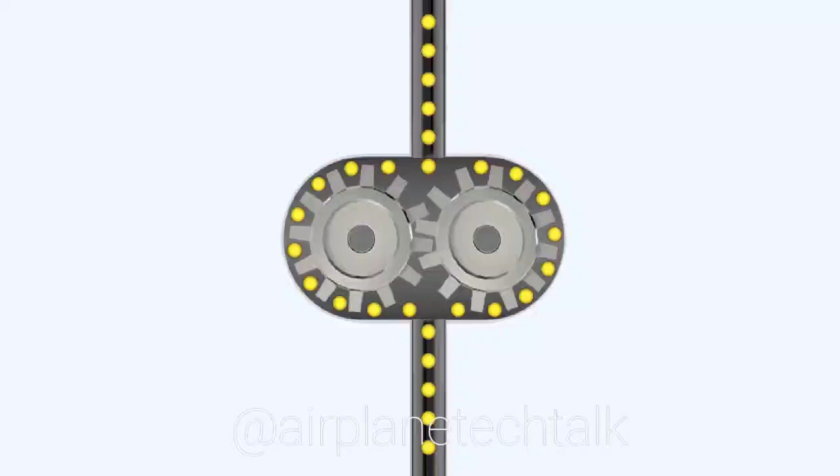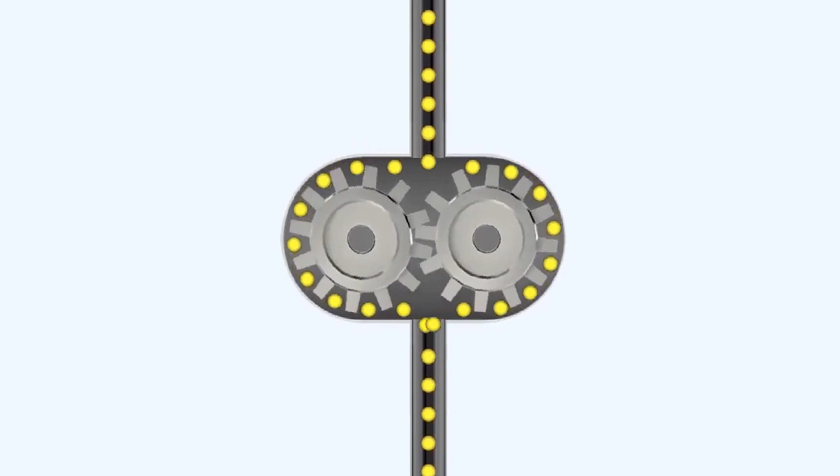Gear-type pumps, which consist of a pair of intermeshing steel gears located within a close-fitting aluminium housing, are the normal method of delivering and retrieving oil in a recirculatory system. This diagram shows a gear-type oil pump. When the gears are rotated, oil is drawn into the pump, carried round by the teeth, and delivered at the outlet.

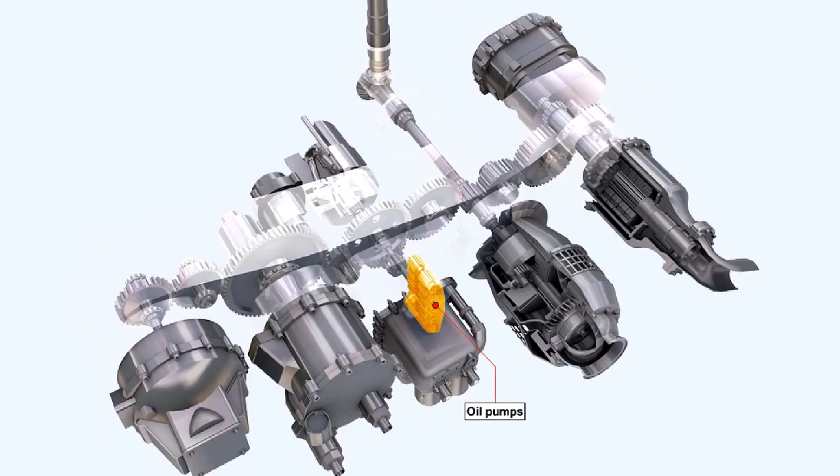The oil pumps, both pressure and scavenge, are fitted on the accessory housing. They are fitted within an oil pump pack, which consists normally of one pressure pump and perhaps as many as 7 scavenge pumps. Having several scavenge pumps ensures that the lubrication system remains a dry sump system.

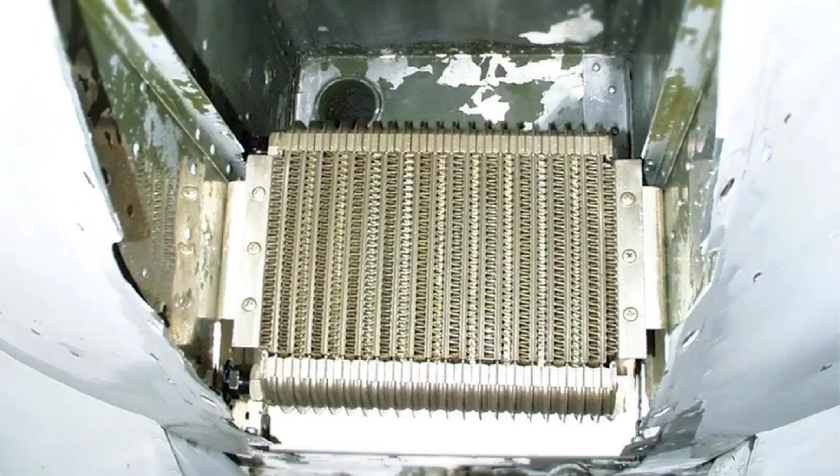Oil coolers can be either air-cooled or fuel-cooled. We've seen that some engines use both systems. If an engine does use both air and fuel to cool the oil, temperature can be monitored electronically, and the air cooler switched in only when it's deemed necessary. The oil temperature is maintained at a value which helps to improve the thermal efficiency of the engine.

Whether it is fuel-cooled or air-cooled, the oil cooler is basically a radiator, which exchanges heat from one medium to another. The oil cooler consists of a matrix assembly, which is partitioned by baffle plates. The baffle plates ensure that the oil takes the longest path through the matrix, and it thus gains maximum benefit from the cooling effect of the fuel flowing through the tubes within the matrix.

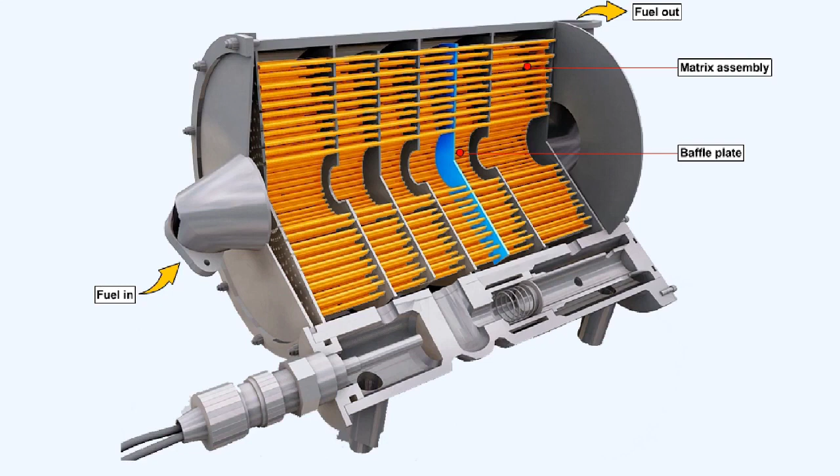The fuel-cooled oil cooler has a double benefit. The fuel in the aircraft wing tanks is invariably very cold, and requires warming up before it gets to the fuel filter. The oil is hot and requires cooling. This device allows both requirements to be carried out within it, a rare chance of achieving 2 for the price of 1.

Incorporated in the fuel-cooled oil cooler is an oil bypass valve, which is fitted across the oil inlet and outlet. If the oil cooler becomes blocked, when the oil pressure in the cooler inlet zone reaches a predetermined value, the oil bypass valve communicates directly between the oil inlet and the oil outlet. This will prevent oil starvation in the engine, and will also preclude the chance of excess oil pressure damaging the relatively fragile matrix assembly.

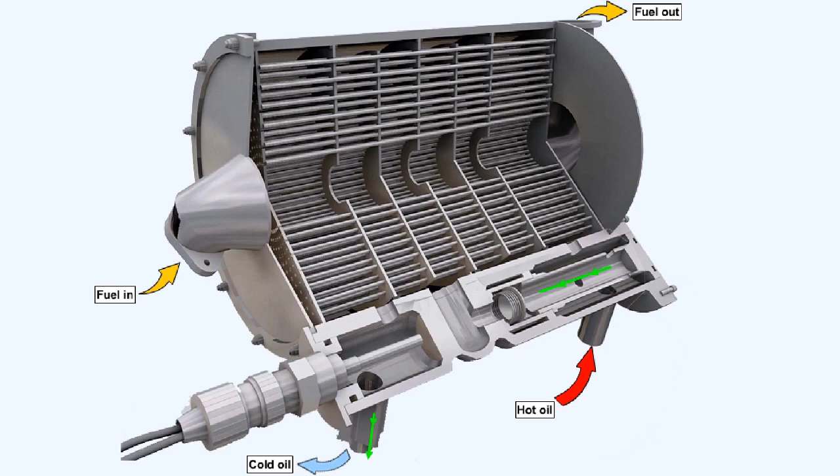In the event that damage to the oil cooler matrix does occur, fuel is prevented from entering the oil system by the oil pressure being kept at a value higher than the fuel pressure. This is done by a pressure-maintaining valve located in the oil feed line to the cooler. Thus the oil will leak into the fuel system rather than the other way round.

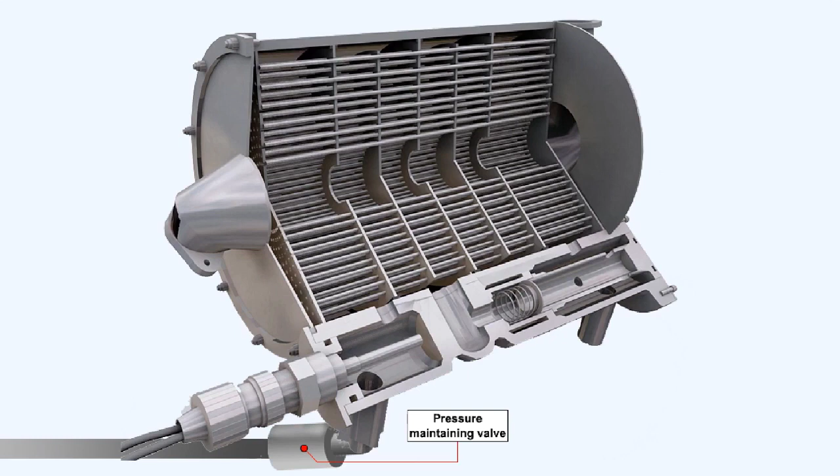Chip detectors, which are permanent magnet plugs, are situated in some of the scavenge lines to collect ferrous material from the oil as it returns to the scavenge pumps. The chip detector is retained in the pipeline by a bayonet fitting within a self-sealing housing. The fact that the valve housing is self-sealing means that the detector can be removed without any loss of oil.

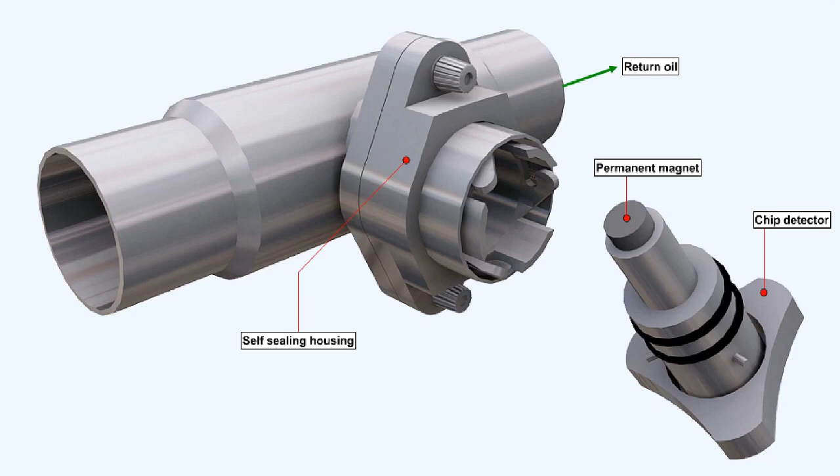Contamination of the magnet by iron filings is illustrated here. This type of contamination can be taken as evidence of impending failure in the bearing chamber, which is being monitored by that particular chip detector.

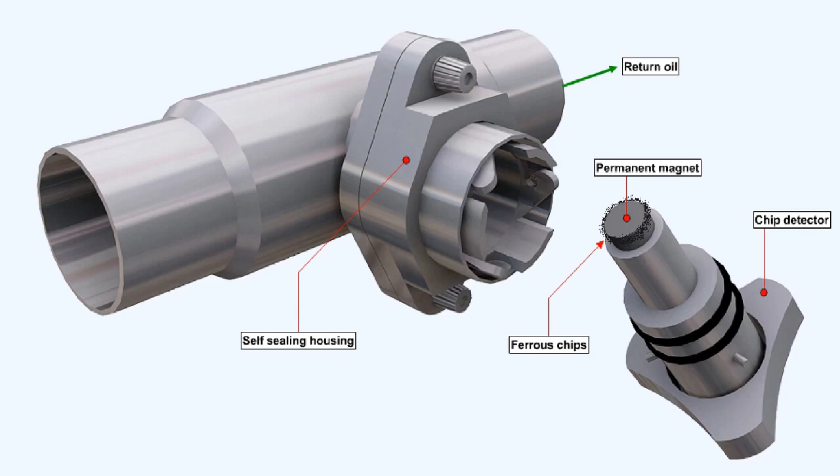We've already stated that to prevent excessive air pressure within the accessory drive unit and the bearing chambers, the interior of the engine must be vented to atmosphere. Airborne oil droplets in the air within the engine form an oil mist which, if it was allowed to escape unhindered, would rapidly deplete the engine oil contents. The oil mist is vented to the accessory drive unit, where it must pass through the centrifugal breather before reaching the atmosphere.

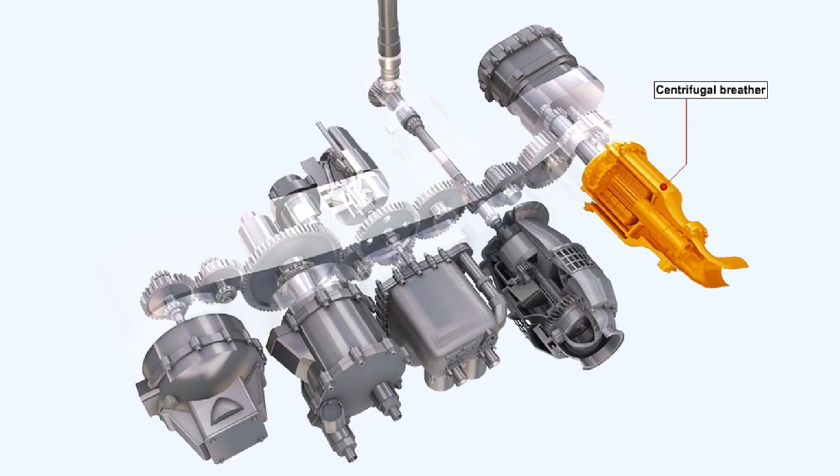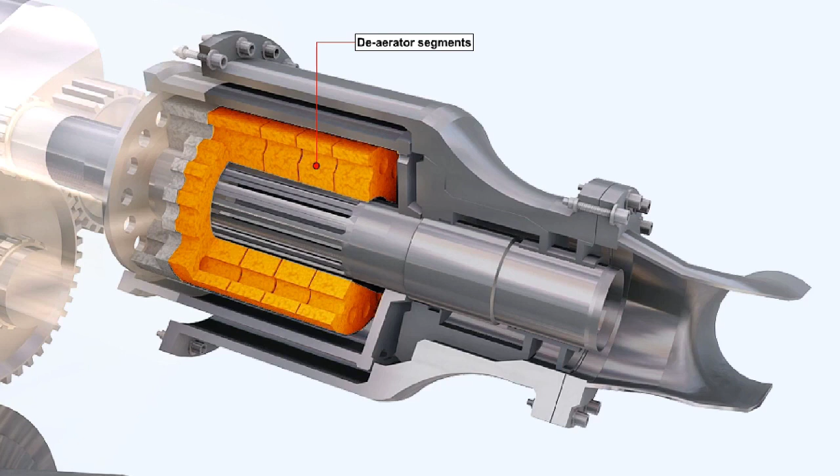The centrifugal breather is rotated at high speed, and as the oil mist enters, it's thrown outwards by centrifugal force. Around the inside periphery are de-aerator segments. The oil is separated from the air and is eventually flung back into the accessory drive unit to be picked up by a scavenge pump.

The air, having less inertia, makes its way out of the center of the rotating portion of the breather to atmosphere, having had all of the oil removed from it. Thus the centrifugal breather minimizes oil loss in the gas turbine engine.

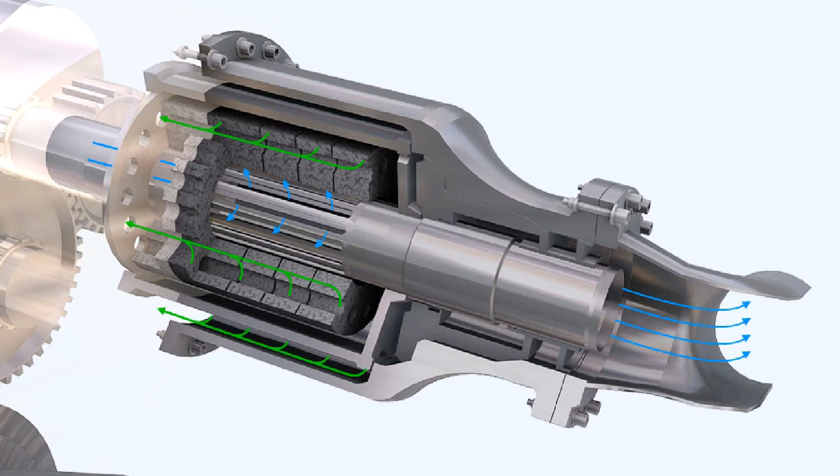To facilitate the oil's task of cleaning, a number of filters and strainers are positioned within the lubrication system. The filters and strainers prevent debris and foreign matter from being continuously circulated around with the oil.

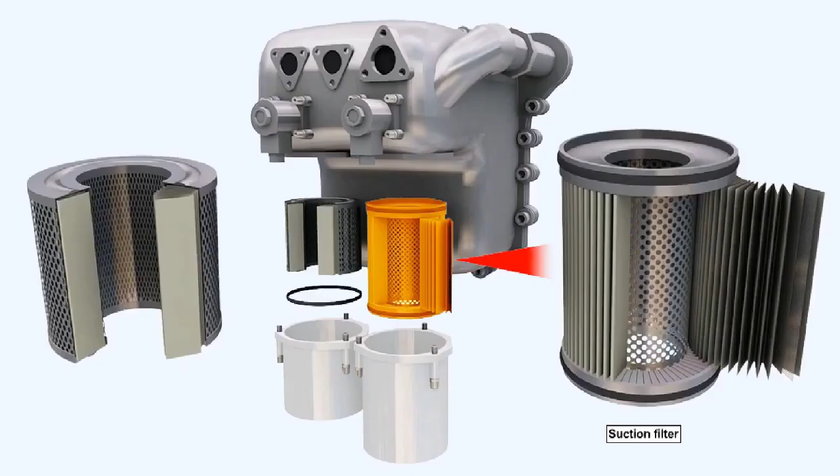As described earlier, the oil is drawn from the oil tank through a suction filter before it goes into the pressure pump. The suction filter takes the form of a coarse strainer, which prevents debris being drawn into the pump and damaging it.

At the outlet of the pressure pump, a pressure filter is fitted. This is a very fine mesh filter, which will retain any small particles which might block the oil feed jets.

Thread-type filters perform the function of a last chance filter immediately prior to the oil jets.

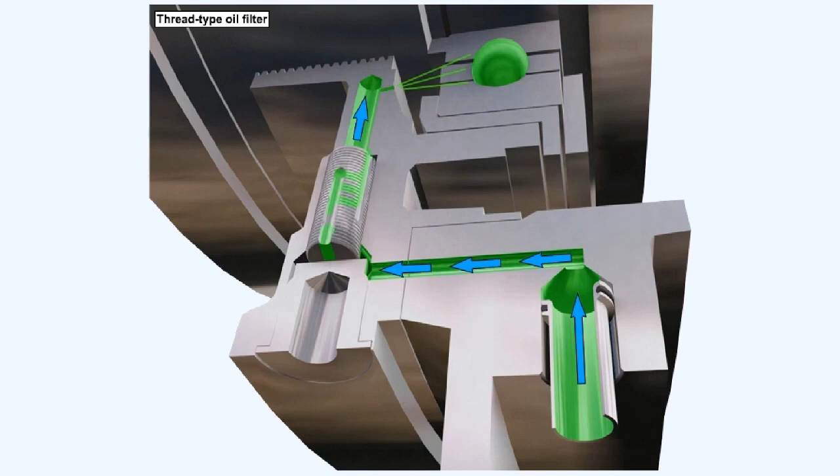Each return oil line contains a scavenge filter just downstream of the magnetic chip detector. These scavenge filters will collect any debris returning from the bearing chambers.

Both pressure and scavenge filters are constructed in a tubular form from either a very finely woven wire cloth or resin impregnated fibers.

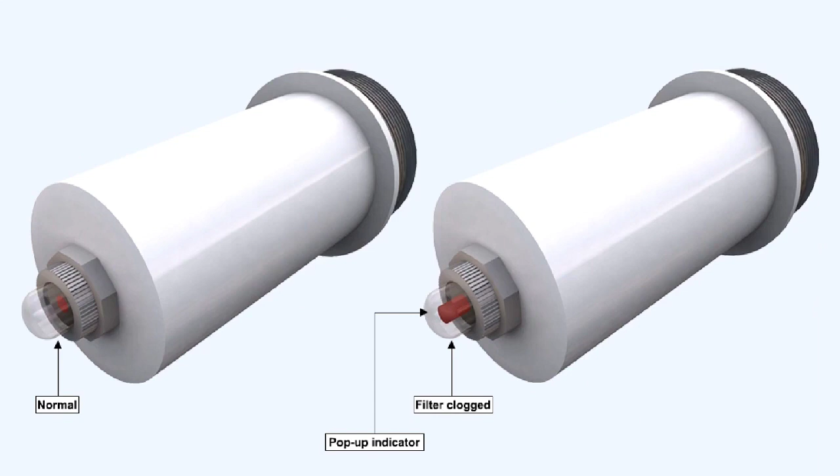Some filters may have a differential pressure switch fitted across them, or alternatively they may be fitted with a pop-up indicator, a small button which can be seen protruding from the filter casing to give a visual warning of a partially blocked filter.

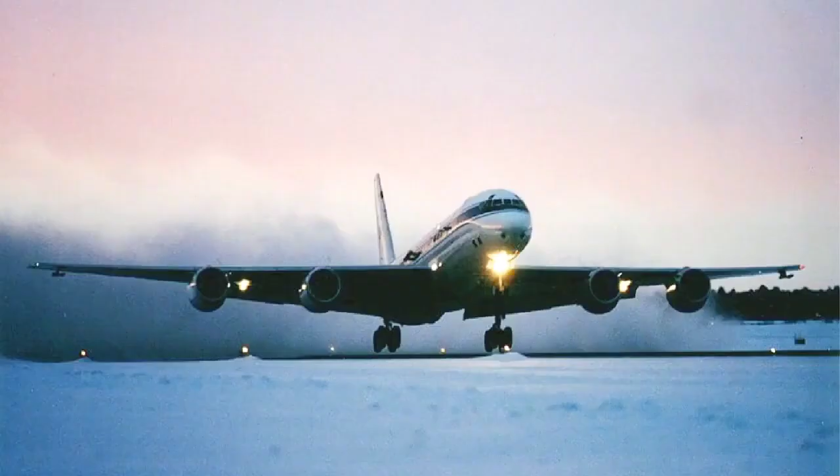Gas turbine engine oils must have a high enough viscosity for good load carrying capacity, but they must also have a sufficiently low viscosity to ensure a good flow of oil at low temperatures, as would be the case, for instance, when starting after a prolonged cold soak.

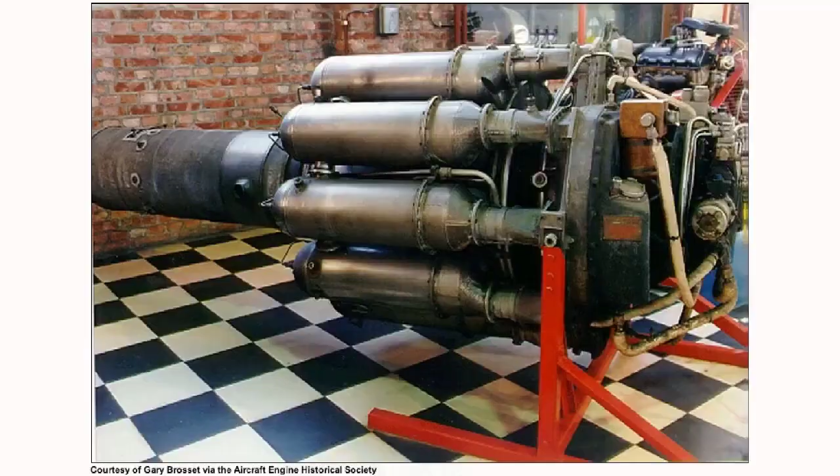Early gas turbine engines used the same oils as had been used in petrol engines for years. These oils were mineral-based. It was found that under the higher temperatures and speeds at which gas turbine engines operated, mineral oils burnt, gummed, and oxidized.

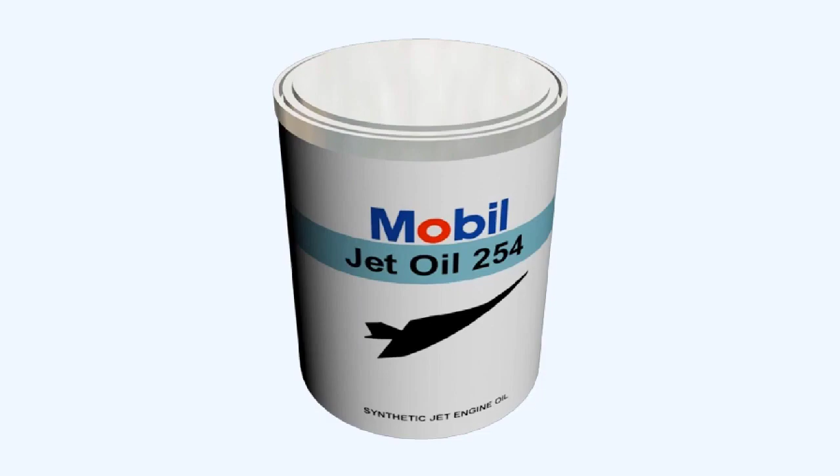To attain the properties mentioned at the beginning of this lesson, synthetic oils were developed. Synthetic oils have the following qualities: low volatility to prevent evaporation at high altitudes,

a high flash point which will prevent the lubricant igniting at high temperature points within the engine, such as at the turbine bearings,

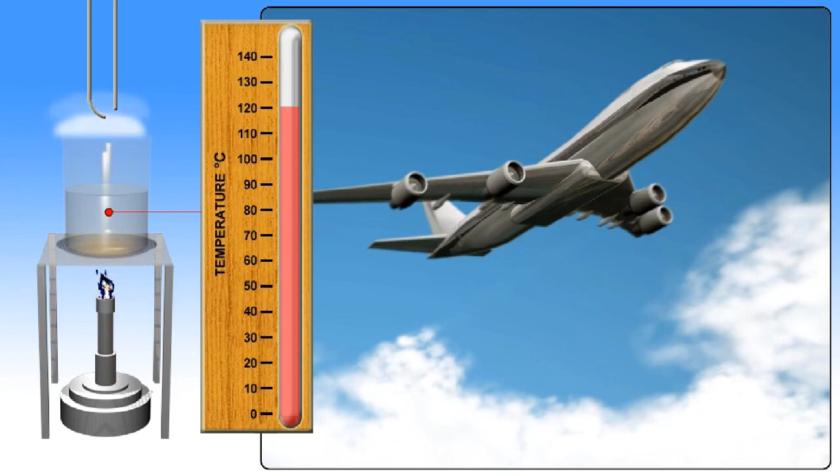a high film strength which gives the oil molecules the ability to stick together under compression loads and adhere to surfaces under centrifugal loads,

a wide temperature range. Most gas turbine lubricating oils have a temperature range of minus 45 degrees Celsius to plus 115 degrees Celsius.

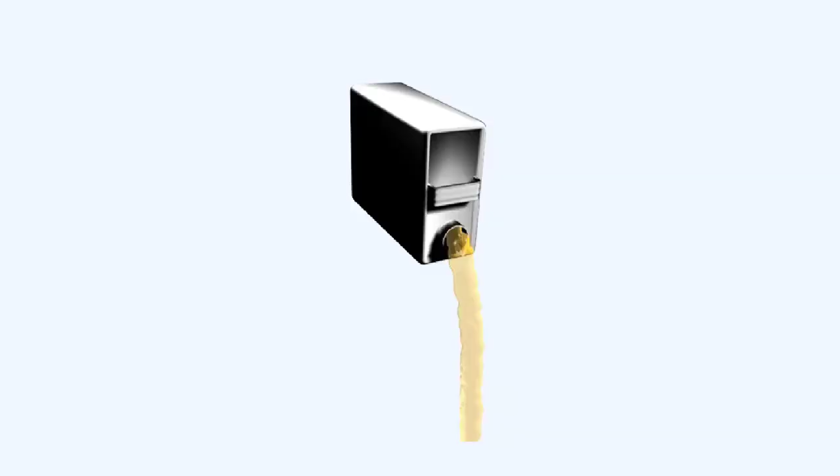A low viscosity, which increases the ability of the oil to flow under low temperature conditions.

A high viscosity index, which is an indication of how well the oil retains its viscosity when heated to its operating temperature.

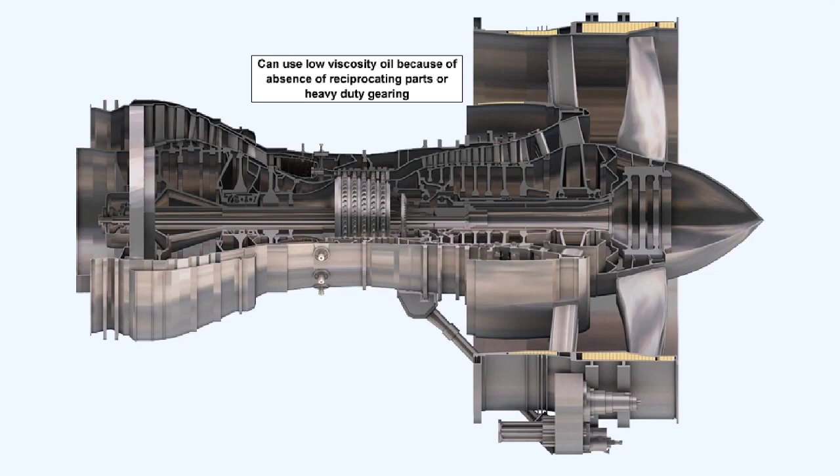Low viscosity oils can be used in gas turbine engines because of the absence of reciprocating parts and heavy-duty gearing. However, turboprop engines, which have reduction gears and propeller pitch change mechanisms, require a slightly higher viscosity oil.

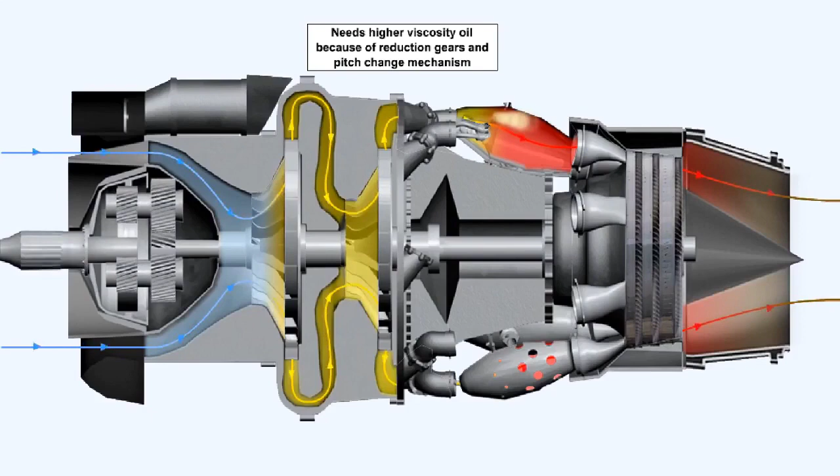Gas turbine engines are invariably dry sump engines. The oil level of a dry sump engine should be checked immediately after engine shutdown, or at least within a specified time after engine shutdown. This concludes the lesson on lubrication.